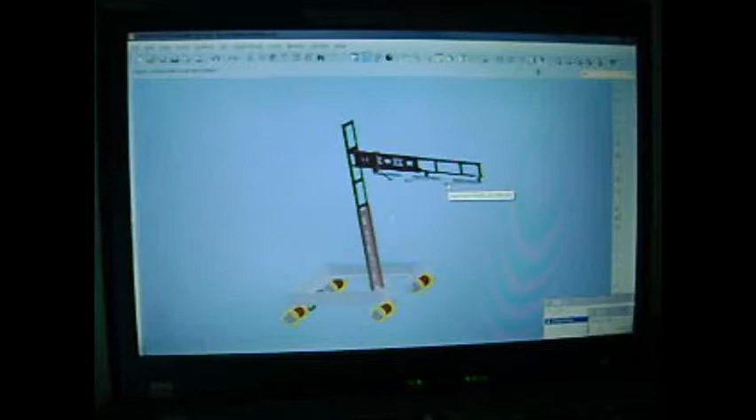Everyone, we are from the team TerraQuest and this is a robot for the event Call of Duty. This is a picker robot. As you can see, it consists of 4 wheels at the base and 2 of them are being powered by 2 motors, and these are the rear wheels, and the front ones are free to move. All these are attached to the base.

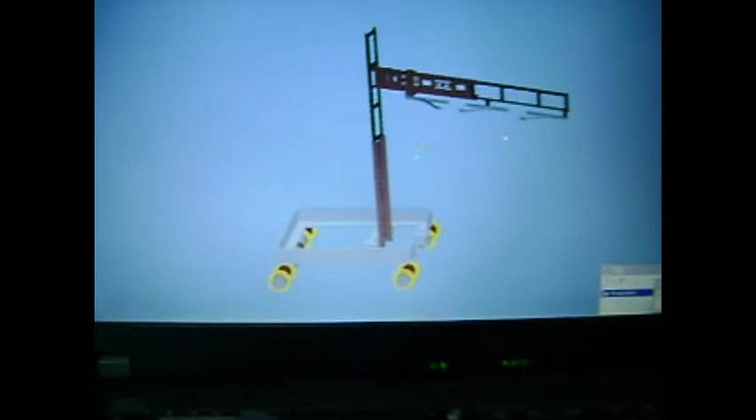The base also consists of a tower and an arm, and this tower can be rotated by a motor placed below the base, as you can see right over here. Now this arm is used to pick up the fuse poles by moving it in the up and down direction. As you can easily see, it is a slider. Both the arm and the tower are sliders, and they can be moved in the up and down direction to pick up the fuse poles.

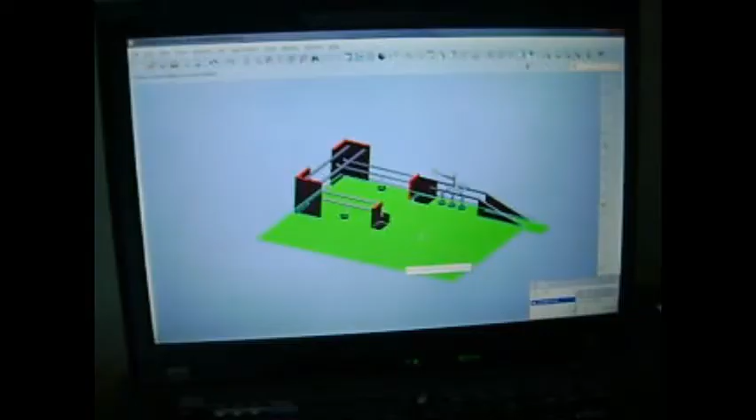Now coming to the arena, as you can see here, this is the same picker robot. It is placed on the rails. Now this arm will be used in moving it to the down direction and picking up the fuse poles, and then the picker robot moves to the front and transports the fuse poles through its arm to the transporter robot. That we have seen in the Pro/E design.

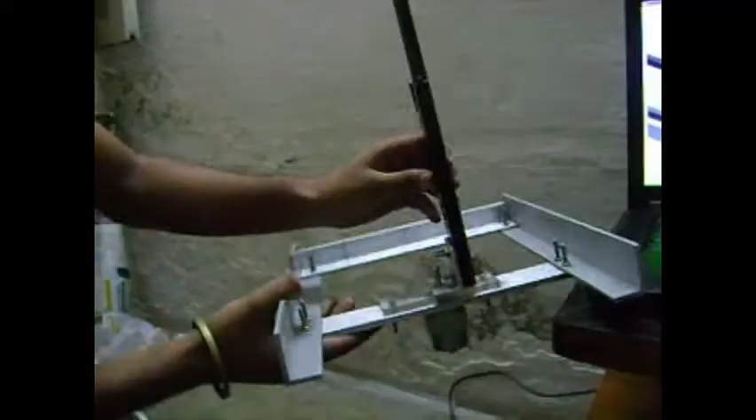In this model, the motors are clamped at the base, which rotates the slider in the horizontal direction, and the slider which moves up and down, and the wheels which are clamped in the base of the model. And this model is under construction.

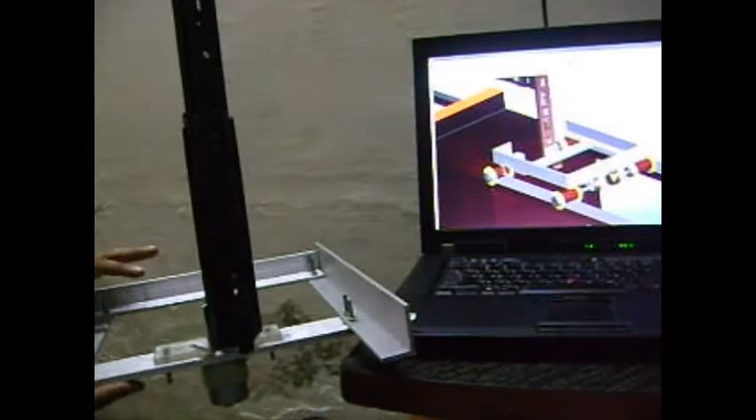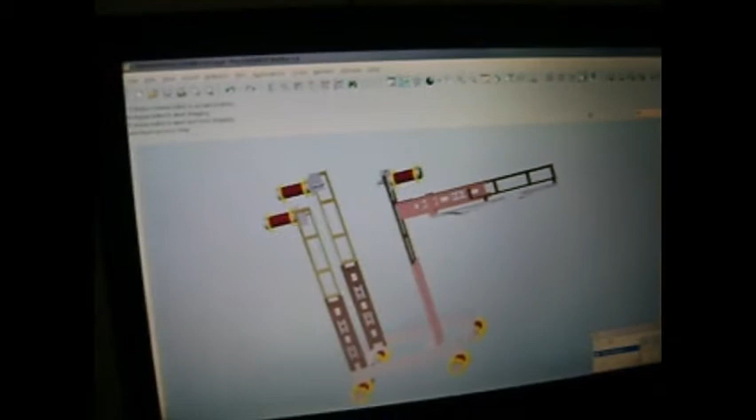This is the design of the transporter robot. It is the same as the picker robot, except for the 2 towers which are present at the base, behind the original tower which consists of the arm, and these towers are for providing the overhead switching locomotion mechanism for the overhead rails. As you can see, it consists of 3 wheels right at the top of these towers, and these are also sliders.

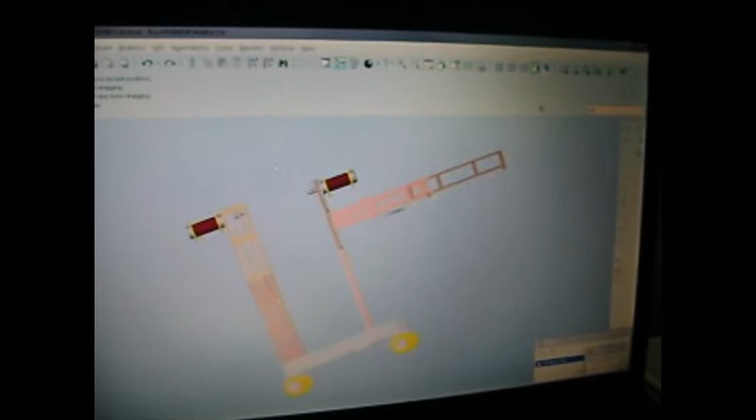Now as the robot approaches below the overhead rails, these wheels are connected through the belt and pulley to these motors present at the base, and these motors become idle at the time we are at the overhead locomotion mechanism. So these motors will rotate, and they will transmit the power to the overhead wheels, and they will then make the robot move in the direction perpendicular to the base rails.

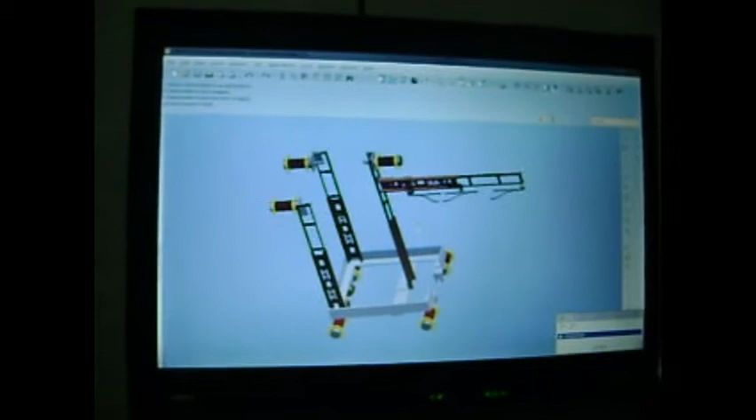And for the transport of the fuse poles from the picker robot to the transporter robot, here we have the same type of slider right over here in just the opposite direction, and it moves in the forward direction and picks the fuse poles with the help of these forceps, which are placed in the form of grippers, and they can be used to drop the fuse poles right below the rails.

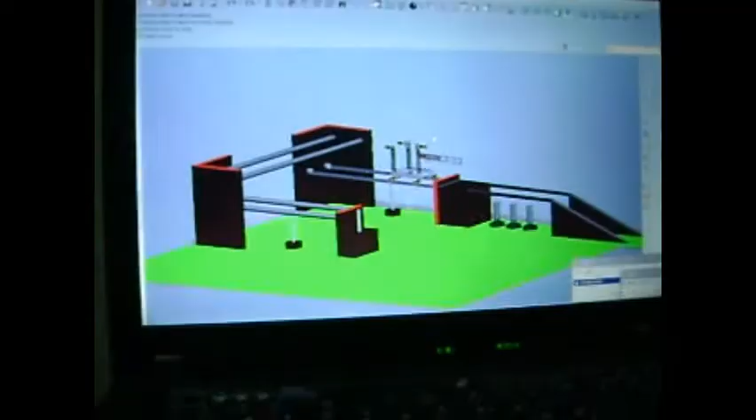Now coming to the arena, this is the transporter robot. It is placed right over here, and it can translate on these rails. Now as the robot approaches right below the overhead rails, these sliders then translate in the upward direction, as you can see, and they fix themselves on the overhead rails.

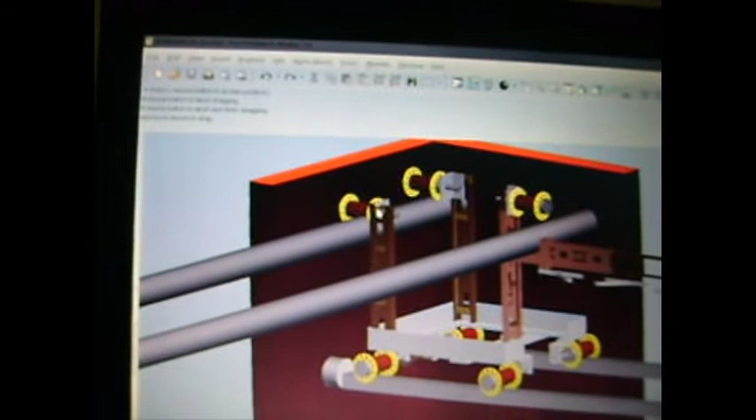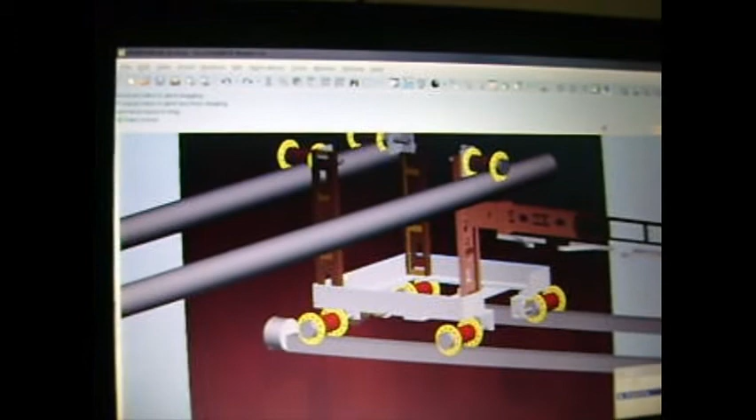And then the power is given by the motors placed right below the base, and this power is then transmitted to these wheels, and they then start translating on these overhead rails, and the whole body can be lifted through the rack and pinion attachment, which is placed on these sliders.